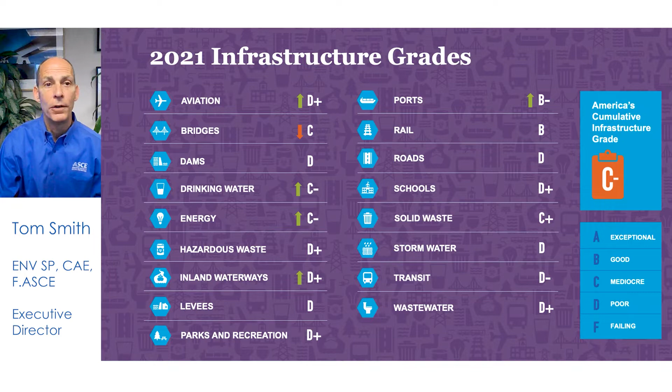For the first time ever this year, America's cumulative GPA is a C-. This GPA has improved slightly from a D+ in 2017, indicating we've made progress around the margins in some infrastructure areas. However, 11 categories are still in the D range, including much of the infrastructure Americans interact most closely with every day, like roads, transit, dams, and levees. Often these categories are where we failed to make investments needed to maintain the assets that were built 50, 75, or more years ago.

One of those 11 categories was stormwater. Stormwater earned a D in 2021, and this was the first time we graded this category. Stormwater utilities are on the rise, but there are many challenges to better managing stormwater across the country. Impervious surfaces in cities and suburbs are expanding, exacerbating urban flooding, which results in $9 billion in damages annually.

Many of the country's legacy stormwater systems are struggling with the high cost of retrofits needed to accommodate climate change. Federal funding, though up in recent years, averages about $250 million annually, which leaves a growing annual funding gap of $8 billion just to comply with current regulations.

I want to underscore the impacts of chronic underinvestment in our infrastructure. As Congress debates the largest investment and now has passed in our water, transit, road, and bridge systems in a generation, action is urgently needed.

Failing to close this infrastructure investment gap brings serious consequences. According to ASCE's latest economic study, Failure to Act, if we do not address the infrastructure investment gap, our economy will lose $10 trillion in GDP, nearly half the annual US GDP in 2019, more than $23 trillion in total output, primarily business sales, and more than 3 million jobs in 2039.

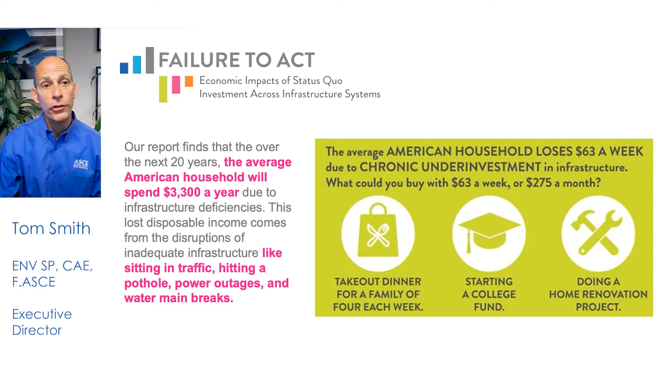So now that we've talked about all these challenges and implications, what do we do to protect the economy, address the investment gap, and provide a more sustainable and resilient future? The solution requires action at many levels. ASCE's report card defines key solutions centered on leadership, investment, sustainability, and resilience.

There is, of course, a very positive development on the leadership and investment front, with last month's passage of the historic bipartisan infrastructure bill, known as the Infrastructure Investment and Jobs Act. The legislation includes $1 trillion in spending, of which $550 billion is new federal money for infrastructure.

It also includes $110 billion for roads, bridges, and major projects, $66 billion for passenger and freight rail, $65 billion for broadband internet, $46 billion for resilience to help states and cities prepare for droughts, wildfires, climate change, and more, $39 billion for public transit, and $17 billion for ports and waterways.

The legislation has certain pay-fors. The negotiators agreed to repurpose over $250 billion from prior pandemic aid, including $50 billion from expanded employment benefits to fund the plan.

Additionally, the agreement proposes to save $50 billion by delaying Medicare's rebate rule, raise $30 billion from tax information reporting requirements on cryptocurrency, and collect $50 billion in fraudulently claimed unemployment benefits throughout the pandemic. This is a generational investment in the nation's infrastructure, following decades of advocacy and education.

We believe this will have a monumental impact on the economy, public safety, global competitiveness, and each American's well-being. Passage of this 5-year, $1.2 trillion bill proves once again that the country can lead with sustainable, resilient, and safe infrastructure.

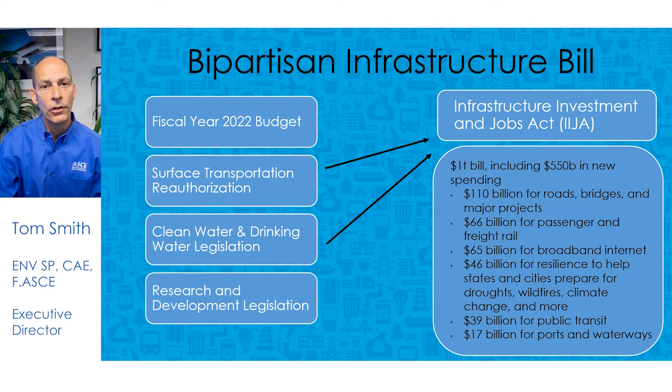Of course, this is really just the beginning and not the end, and there will be a great deal of work with federal agencies, state and local governments, and the private sector as we move into the implementation phase. As infrastructure investment moves forward with a national vision and partner, ASCE is focused on ensuring that public and private infrastructure investments are forward-thinking.

Last year, the ASCE Board of Direction approved a comprehensive rewrite of the ASCE Code of Ethics, the most extensive change to our ethical code in more than 45 years. Looking forward with this new Code of Ethics, we're working to advance its goal that all infrastructure is safe, sustainable, and resilient, and that civil engineers develop and apply innovative, state-of-the-art practices and technologies.

ASCE's new Code of Ethics has a stronger focus on sustainability, including responsibilities to adhere to principles of sustainable development and mitigate adverse societal, environmental, and economic effects, using resources wisely while minimizing resource depletion.

Among other initiatives, ASCE also formed the Institute for Sustainable Infrastructure over 10 years ago. That's a joint program with the American Public Works Association and the American Council of Engineering Companies, as well as the Harvard Zofnass Sustainability Program, that has developed the Envision rating system. This is a tool designed to recognize and encourage sustainable infrastructure development, and can be used for planning, designing, and rating projects.

ASCE also helped create the International Coalition for Sustainable Infrastructure, which includes a partnership with the Global Covenant of Mayors for Climate and Energy. Next week we're hosting the International Conference on Sustainable Infrastructure, a virtual event focused on sustainable and resilient infrastructure at the local, community, and global level. An advocate for sustainable infrastructure, Prince Albert II of Monaco, will also be speaking at the event.

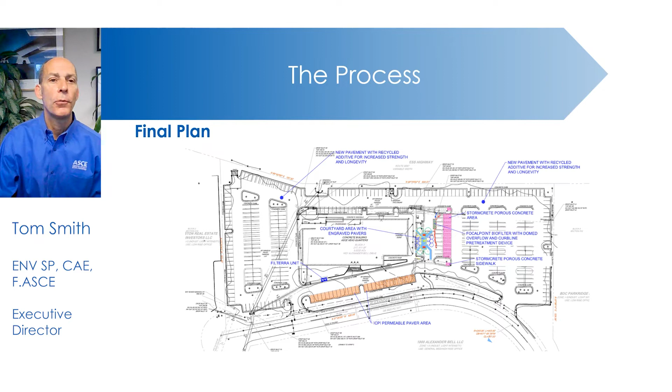24 parking spots with permeable interlocking concrete pavers were added in front of the ASCE office building, consistent with ASCE Standard 68-18 on permeable interlocking concrete pavements. These are interlocking concrete pavers and are a fantastic BMP product with very low maintenance.

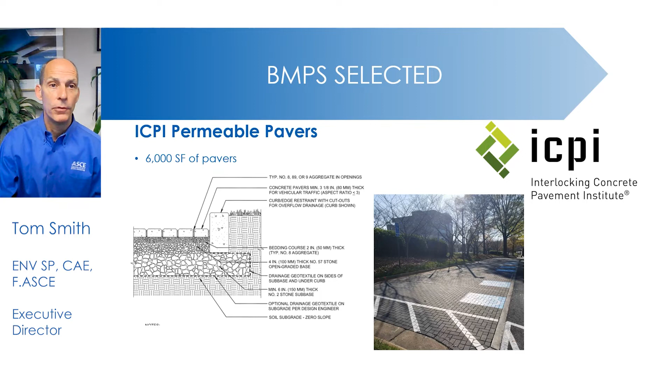The water goes in through the rocks and into the subgrade, flowing into a stone base and subbase layers that serve as a reservoir that can store and infiltrate flows from a 100-year storm event. Filtration, settlement, and infiltration are occurring during the process with a minimum of 50% removal of phosphorus and often 80 or 90% removal.

Around the corner from this area, 11 parking spots were created using Stormcrete precast porous concrete panels made by Porous Technologies. The panels are manufactured with a concrete mix that has a uniform coarse aggregate gradation and includes minimal fine aggregates. These materials are used in a proprietary mix that results in a large volume of interconnected voids, 15 to 20% voids.

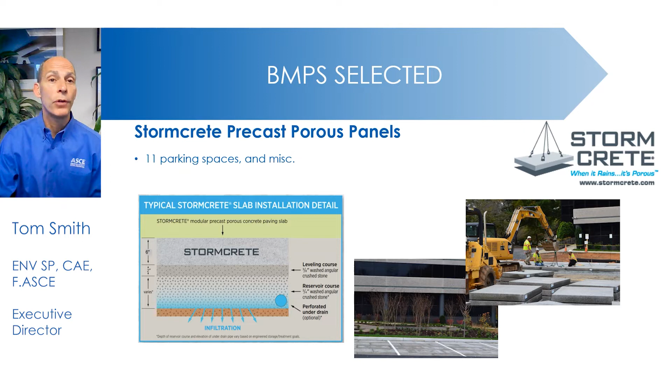The voids allow stormwater to pass through the panels into the soils below, and from there into a biofiltration structure called Focal Point, made by ACF Environmental.

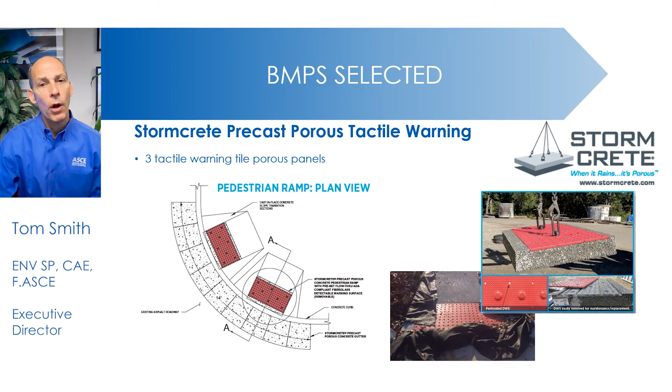One issue with porous pavement has been compliance with the Americans with Disabilities Act, or handicap accessibility. Stormcrete has a product that makes porous tactile warning panels, which are required by ADA and which you can see here. The Focal Point bioretention system uses high flow media to treat the runoff faster and in a smaller footprint than traditional systems.

The system treats for common urban runoff pollutants, including total suspended solids, phosphorus, and nitrogen, while also providing reductions in oils, grease, and bacteria. After that treatment, the runoff flows through an outlet pipe to the existing storm drain.

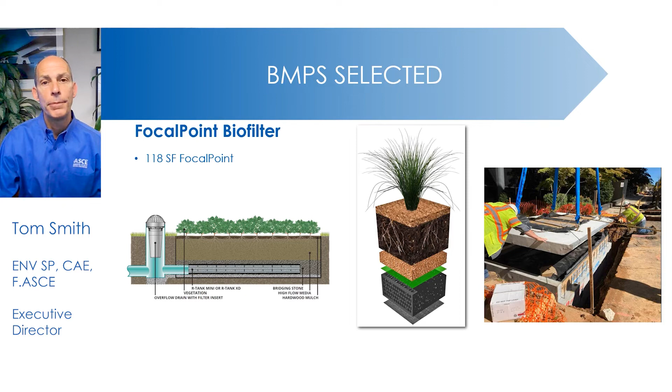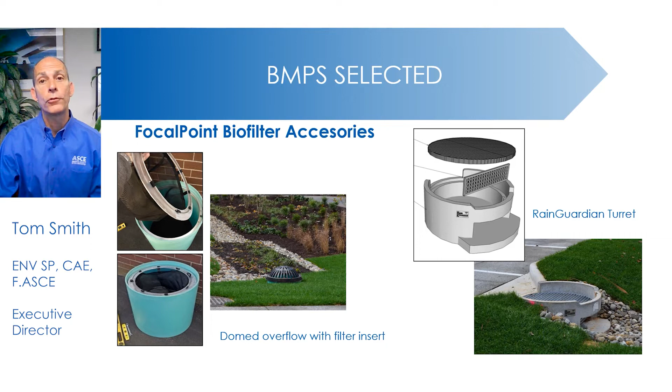The domed overflow helps maintain larger storm events, and the filter insert collects any mulch or debris from the surrounding planting areas. The RainGuardian turret is a pre-treatment device that collects any leaves or trash that might come off the upstream pavement area, protecting the biofilter behind it.

The other bioretention system, the Filterra tree box, was located just upstream from an existing drain inlet. This 13 by 7 foot filtering unit was shoehorned into a spot in the sidewalk near the building's front steps, between finished pavement and existing utilities behind the curb and next to the building.

There's an opening in the curb that brings water from the surface into the Filterra tree box, and then there's a biofiltration medium that processes the stormwater at a faster rate. Runoff enters the unit not through the pavers, but through an existing curb inlet.

Stormwater flows through a specially designed filter media mixture contained in a landscaped concrete container called the Filterra tree box. The filter media captures and immobilizes pollutants, which are then decomposed, volatilized, and incorporated into the biomass of the Filterra system's micro and macrofauna and flora. The system aids in the removal of 50% of phosphorus materials.

The remainder of the parking lot, some 105,750 square feet, was repaved with 1,200 tons of asphalt made with recycled tires supplied by Asphalt Plus.

The pavement for the project included 11 pounds of Elastiko brand chemically engineered crumb rubber per ton of asphalt, which equates to roughly 722 scrap tires that were recycled and kept from landfills.

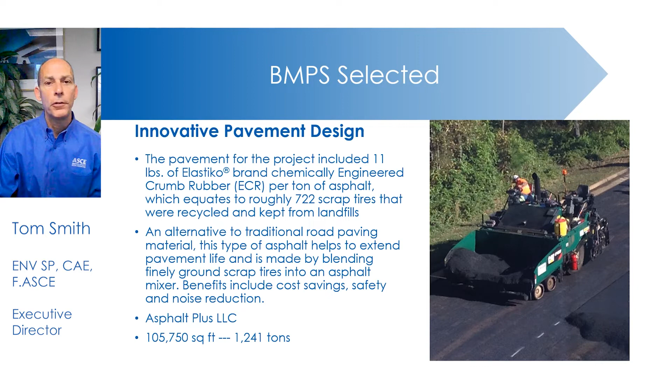Additionally, the pavement has been shown to last longer, require less maintenance, and use less material than standard pavement, equating to a lower life cycle cost.

The parking area also includes a new vegetated courtyard, which features pavers engraved with the names of ASCE members, ASCE Foundation donors, and others. Without these donations, as well as the in-kind and material donations made toward the project, the cost would have been $700,000.

With those donations, the actual outlay that the foundation made for the services and materials was reduced to $440,000. We also added informational signage on the site, and I hope you all can stop by sometime for a tour.

In addition to our efforts to walk the talk on sustainability and civil engineering, we also want to be thought leaders in looking at the future. We wanted to look far enough into the future to ensure we didn't just extrapolate a view of the future that was not much different than the present.

We started with research in future trends and a classic future scenario analysis. That has been completed, and now we're creating a computer model by which we visualize those results. To help us understand the impact of that, the Future World Vision project creates an immersive environment.

We want everyone to really imagine 5 communities of the world 50 years in the future, all designed to be radically different and provocative. So we're creating virtual worlds from a very macro city-wide view right down to a neighborhood view so the users can really begin to understand how they will live. And engineers can explore, collaborate, and consider how they can make the future a better place to live.

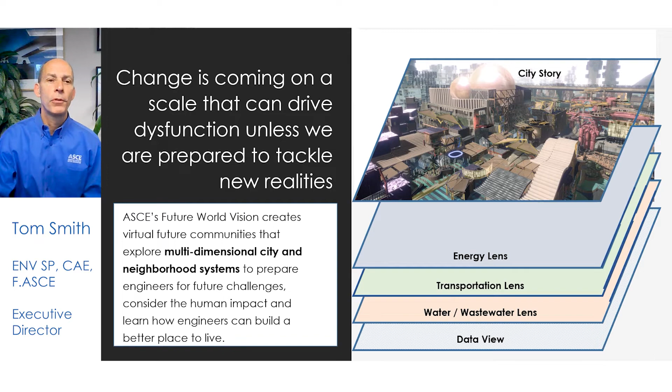That allows us to take the right steps toward life cycle resilience, with both the present and the future properly considered. These are the 5 city worlds that we selected.

They will emerge and evolve in the approximate timeline, and the ones further out on the timeline are obviously more speculative than the ones that emerge sooner.

This chart shows just a few of the ingredients that help us to create these future communities, in addition to speculation based on our research. We also model innovations from a variety of disciplines and a few relatively unpredictable disruptions.

Future World Vision is not attempting to predict the future. It is a platform by which we ask ourselves questions about the future, so we are not surprised by those unexpected conditions if they occur, or caught off guard in failing to prepare for them.

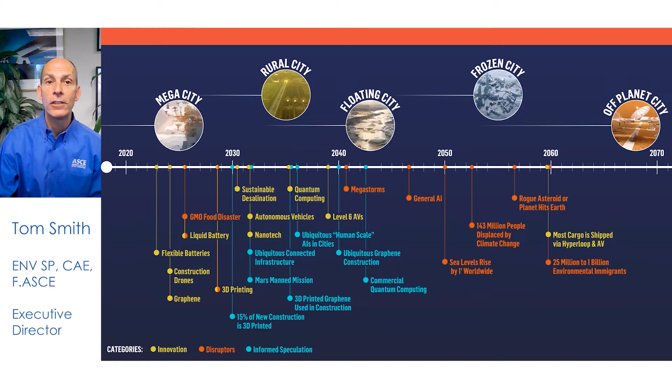Our research yielded a few key transformational imperatives that engineers need to embrace in order to design and build the desired future built environment that is plausible in 50 years. Let me point out a few of those.

1, the world is focused on climate change, but changes in demographics and urbanization patterns will also have significant impact. 2, we'll be dealing with a world that is digital in everything, which creates the world of autonomy, AI, the Internet of Things, and so forth.

3, we don't know what technological advances will specifically occur, but we can be sure that there will be things like quantum computing, synthetic biology, and new materials. And lastly, the 4th industrial revolution represents the nexus of all these trends, which will force us to understand system dynamics.

We believe the Future World Vision project can have a great impact on our industry and our profession. We think it has the potential to help us make progress toward these transformational imperatives. We want you to be among our network of those that create the future built environment, including the radically different future built environment that's possible.

As we develop all our future virtual cities, we have 2 overarching themes that infuse every element of the city. The digital and virtual worlds will join the analog and physical worlds. The merging of those worlds will continue unabated despite some hurdles yet to be cleared.

Those who design and build the digital infrastructure ecosystem, and those who design and build a physical infrastructure, will need to understand the intersection of what we do.

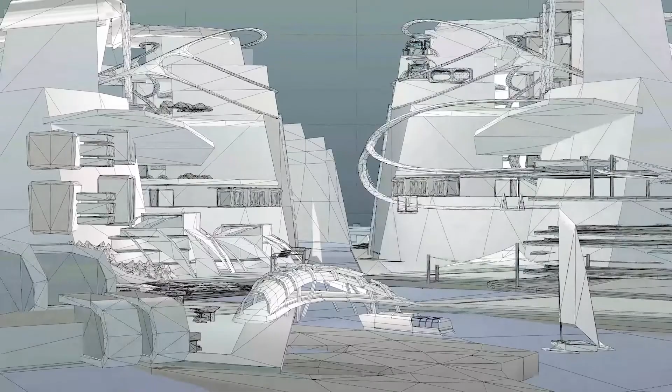How we do our jobs as civil engineers, maybe as systems engineers, will be different in the future. What are the different cities we see evolving, and how can we really get an understanding of those cities? How can we immerse ourselves in those cities today?

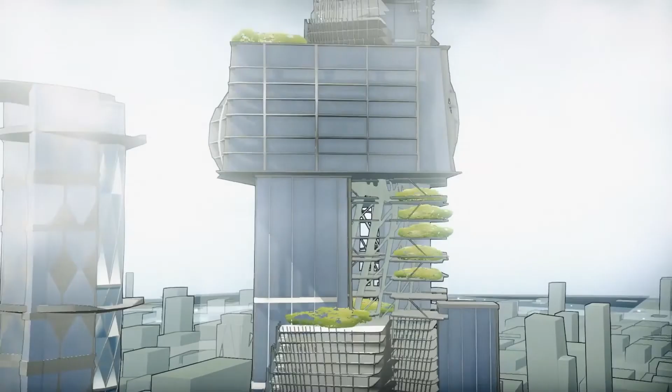What are the different social infrastructures, physical infrastructures that can be created in which we can all come together and thrive? What's really important about looking at this through a world-building lens is that it is designed to look forward and then thread back into the present. The further out you look, the more it changes our view of the present.

What can a megacity grow toward so that it's serving a better purpose? You start looking at individual buildings then, because you can typically shape a building. And can you connect several buildings together?

The buildings might form coalitions and interact with the utility, and the utility will interact with the providers of energy all around. That becomes a transactive energy system, and the buildings can play an active role.

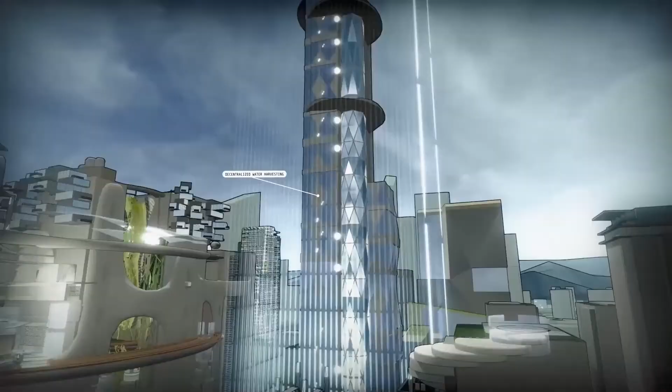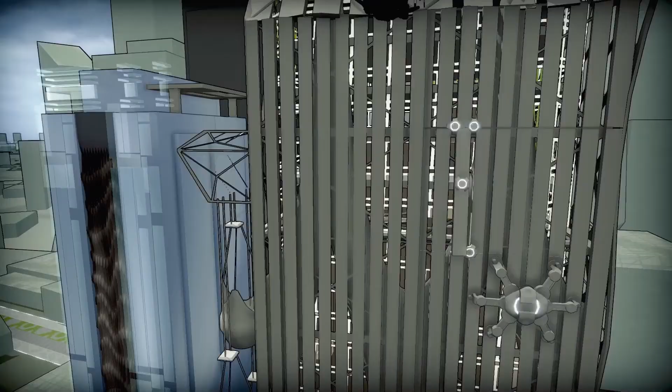Every building in the future should be capturing sunlight and rainwater, and every building should be recycling its own waste. Ideally, the life cycle of infrastructure is one that is continuous, or perhaps reused in the future without going back and re-emitting all that carbon to do the same thing over again. That's the way we've built over the last century, and we simply cannot do it anymore.

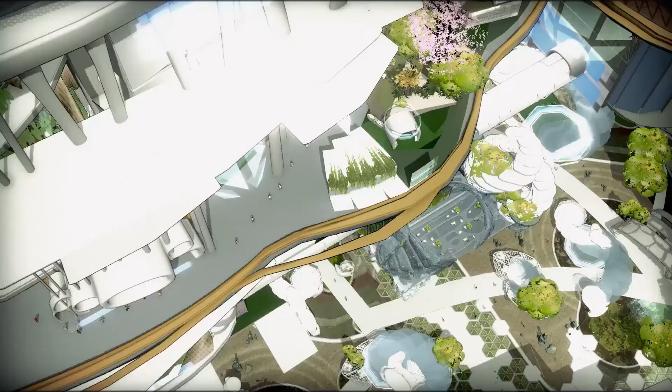Buildings are not unlike a human body. They have bones and skin. They consume energy and regulate temperature and generate waste. What if architects use genetic tools from synthetic biology to encode the architecture of buildings right into the DNA of organisms?

You might have 175 drones coming in at 11:45 a.m. delivering lunch. Where do they land? How much space is between them? What are the specifications?

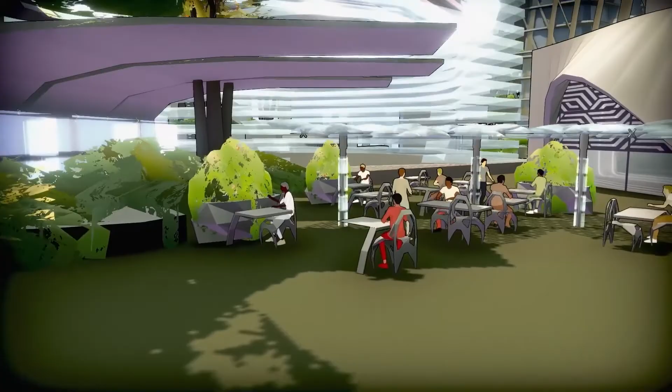It just has to be designed in a way that people can interact, making sure that you're encouraging paths of travel that are spontaneous. We're at just the right point in time to get together and build basically the aerial equivalent of what we did in this country with the national interstate highway system, and no longer be restricted to 2 dimensions.

So how do you get the public involved in civil engineering, in the process of civil engineering? One of the best ways that we can make sure that all voices are heard and included is to start with the people who are doing the planning and developing and see what their teams look like.

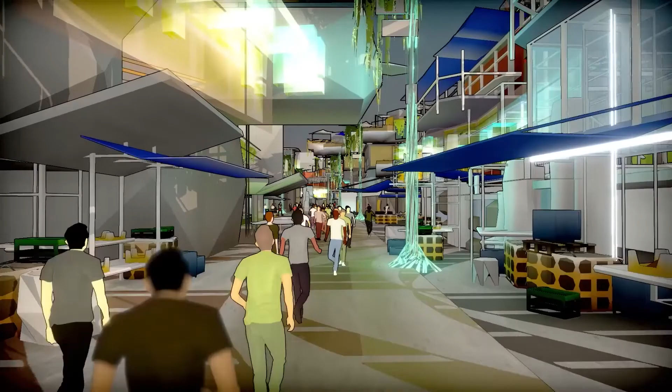How can you ensure social equity and social justice and get input from the community for the projects that we're working on? We are very conscious about the demographic, the diversity of the community and the society, and make sure that we don't leave anybody behind.

Creating these multi-use spaces is one way of doing that, of bringing people together. And once they're in the same shared space, there is more opportunity for connection, there's more opportunity for shared experience, there's more opportunity for civil dialogue.

The best solutions on Earth, they come with diversity of thought. What I love most about the Future World Vision Project is that we can think about it together. We can have this dialogue.

Users will encounter one another and have conversations across disciplines that will begin to feed back and bring new information into the system. We're trying to build a world and trying to build a machine that is creating absolute engagement of the user and of the engineer in their own future.

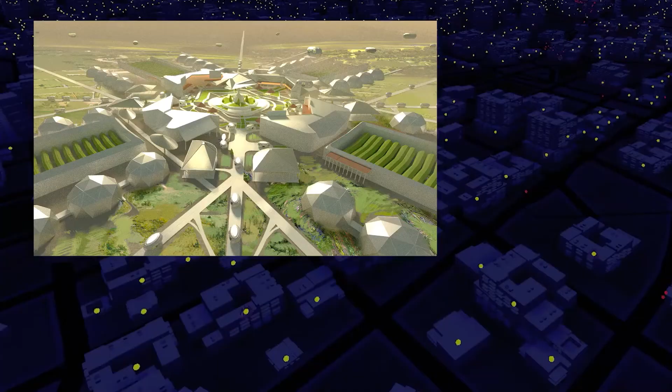Oh my goodness. This 4th industrial revolution, married to the fundamentals of concrete, glass, and steel, is this incredible toolbox for society. As you can see, in this future world of tomorrow, cross-disciplinary thinking will be critical.